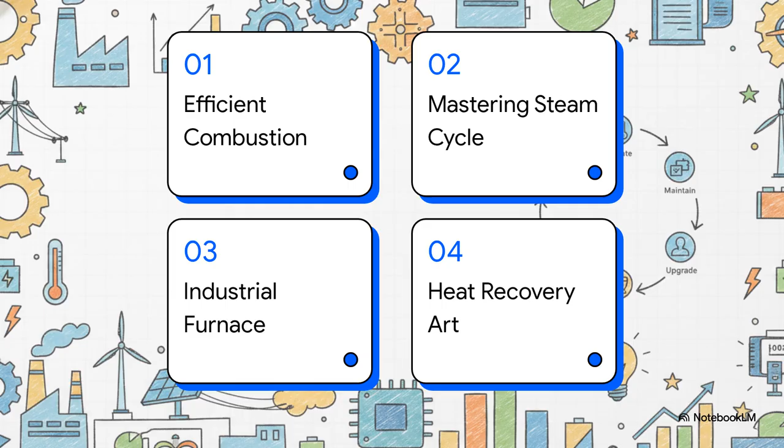Okay, let's dive straight into Section 1, Secrets of Efficient Combustion. We're starting our tour right at the burner. And to really grasp what's happening here, you have to understand something called the stoichiometric ratio. Now, this is the exact, perfect theoretical amount of air you'd need to completely burn a specific fuel. So, for example, to perfectly burn 1 kilogram of pure carbon, you need exactly 11.6 kilograms of air. No more, no less. Now, in a perfect world, that is all you would use, right?

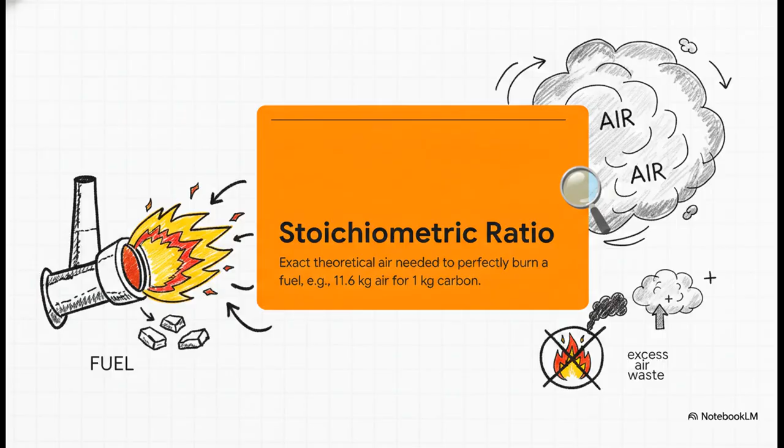But out here in the real world of massive industrial boilers, well, perfect mixing is basically impossible. So engineers actually have to pump in what we call excess air just to make absolutely sure all the fuel burns. Because if they don't, they're just wasting fuel as unburnt carbon. And what we're looking at here brilliantly illustrates how the actual type of fuel dictates that excess air. Natural gas, that is the gold standard. It mixes so incredibly easily with air, so it requires the absolute lowest amount of excess air.

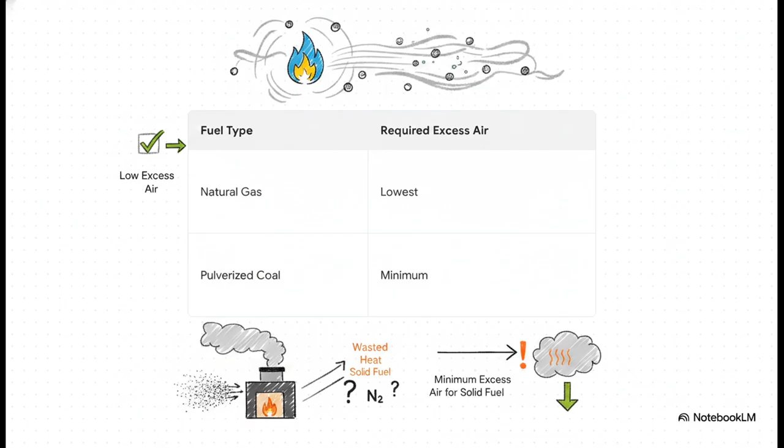But on the flip side, solid fuels are way harder to burn efficiently. However, there's a workaround. If you grind coal down into a super fine dust, what we call pulverized coal, you can actually achieve the minimum required excess air for a solid fuel. And this is a huge deal because the less excess air you use while still getting complete combustion, the less heat you waste warming up useless nitrogen that's just going to fly right out the chimney.

Which naturally brings up a really fascinating question. If we want to be perfectly efficient, why can't we just cool that exhaust gas all the way down to 0 degrees and capture every last drop of heat before it escapes? I mean, it sounds like common sense, right? Why waste it? Well, thermodynamics and chemistry have a pretty harsh reality check waiting for us.

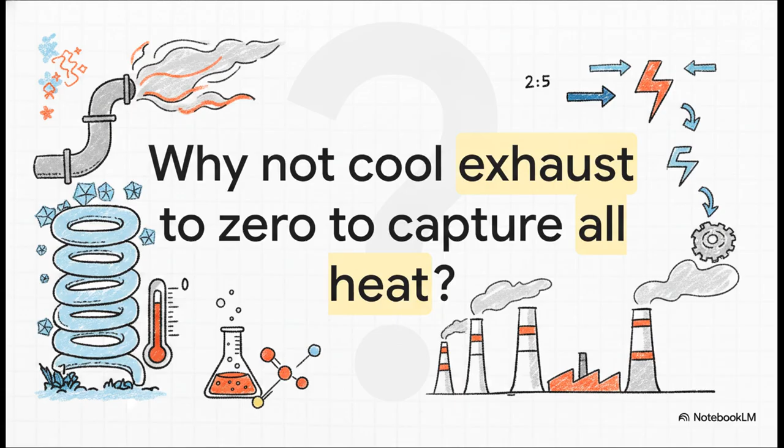So here is the crucial point. It's something engineers call the sulfur limit. You see, a lot of industrial fuels, especially things like furnace oils and coal, naturally contain sulfur. When you burn them, they form sulfur oxides. Now, if you cool that exhaust flue gas too much, that gas actually condenses into a liquid. And because of that sulfur, the liquid is a highly corrosive acid dew. It will aggressively eat right through the metal pipes and the chimney.

It's a nightmare. Therefore, the sulfur percentage in the fuel actively sets a hard, non-negotiable lower limit for your flue gas temperature. You literally have to throw some heat away just to protect your own equipment. Crazy, right? All right, moving right along to Section 2, Mastering the Steam Cycle. We are moving out of the combustion chamber now and into the high-pressure pipes.

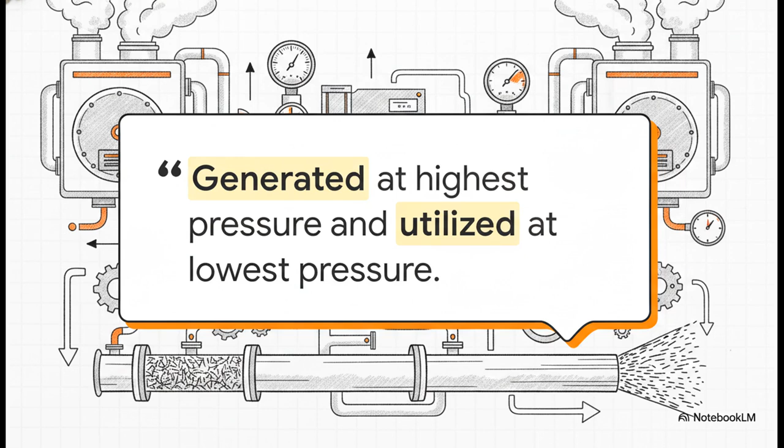Now listen, if you take away just one golden rule from industrial plant engineering today, let it be this one. Steam should always be generated at the highest pressure possible and utilized at the lowest pressure possible. By generating it at super high pressures, the steam takes up significantly less volume. That means you can transport massive amounts of energy through much smaller pipes, which obviously saves a ton on infrastructure.

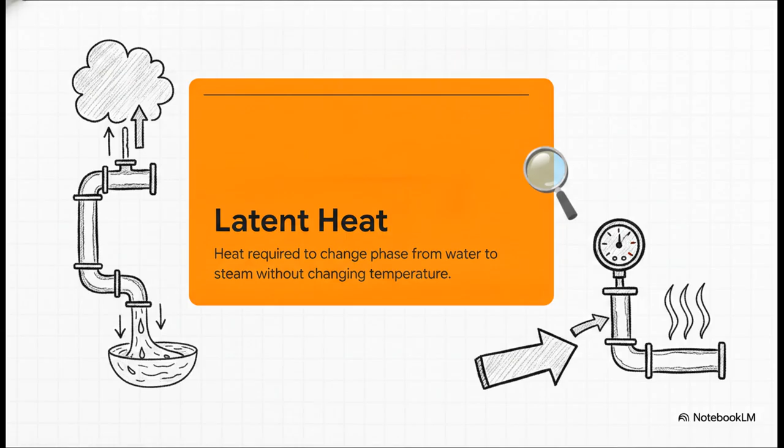But why use it at low pressure? Well, to answer that, we have to talk about latent heat. Latent heat is basically the thermal energy required to change water into steam without actually changing its temperature. When steam condenses back into water on a piece of process equipment, it releases this massive payload of latent heat. And here is the real trick. As steam pressure drops, the amount of latent heat available actually increases. So, using low-pressure steam gives you the absolute biggest bang for your buck when you're heating an industrial process.

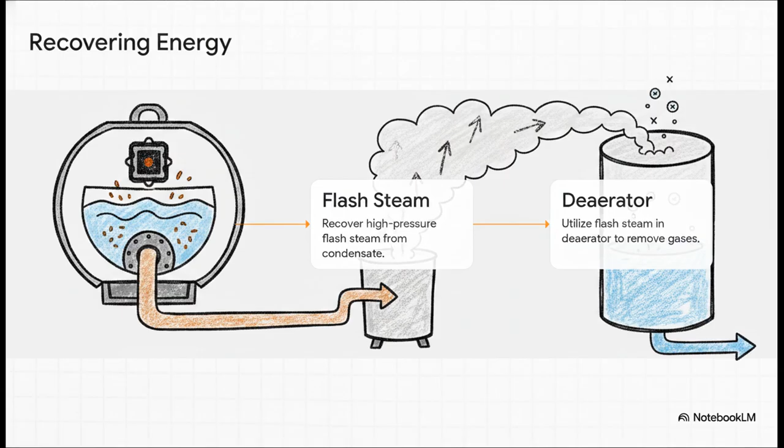At this extreme pressure, the boiling point of water is incredibly high, but the latent heat of evaporation drops to absolutely zero. Zero. The water just instantly turns into a vapor without needing any of that phase change energy at all. Okay, so let's see how all of this builds into real-world energy recovery.

Boilers are constantly boiling water, obviously, which leaves behind these really concentrated solid impurities. To stop the boiler from clogging up, engineers have to perform a continuous blowdown. They basically drain out some of this hot, dirty water. But that water is under high pressure and it's packed with energy. We can't just waste it.

So first, they remove that continuous blowdown. Second, as this high-pressure water hits a lower pressure tank, a portion of it instantly flashes into pure high-pressure steam. And finally, step 3, they recover this flash steam and route it directly into a deaerator. That's a crucial device that uses the heat to basically boil off oxygen and dissolved gases from the incoming feed water. It literally stops corrosion before it even has a chance to start.

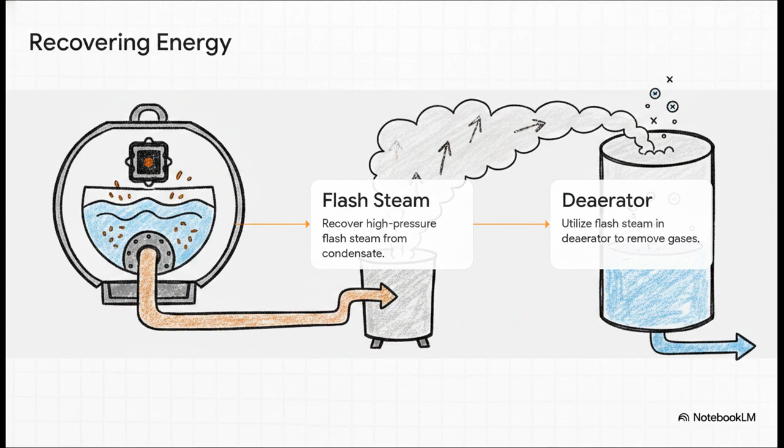Okay, let's step into section 3, inside the industrial furnace. So, leaving the boiler room, we are heading straight into the manufacturing core. And let me tell you, operating a furnace is not just about cranking up the gas. It's a super delicate balancing act. You absolutely have to maintain a slight positive pressure or draft inside the heating zone. If it goes negative, freezing ambient air gets sucked right in through the doors, instantly ruining your efficiency and oxidizing the metal stock you're trying to heat.

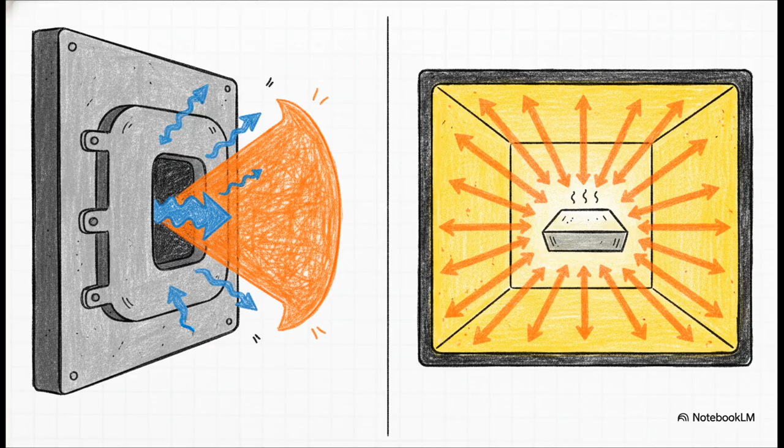Furthermore, at these extreme temperatures, the vast majority of heat transfers into the product via pure thermal radiation. Because of this, engineers apply these special high-emissivity coatings to the inner surfaces of the furnace. This massively boosts the wall's ability to radiate heat directly back into the product. Of course, none of that heat even matters if your furnace literally melts itself, right? And that is where refractories come in. These are highly specialized heat-resistant bricks.

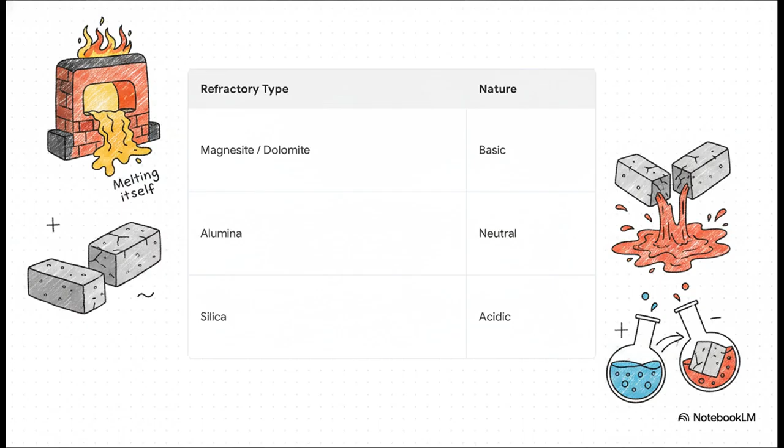The choice of brick depends entirely on the chemical nature of your process. As you can see, magnesite and dolomite are basic in nature. Alumina acts as a neutral refractory, and silica is highly acidic. It's Chemistry 101. If you use an acidic brick in a process that generates a basic chemical slag, that brick will literally just dissolve. The way you actually operate the furnace also completely dictates how you insulate it.

Let's compare batch furnaces, which are heated up and cooled down for every single load, against continuous furnaces that just run nonstop for months. If you use really heavy bricks in a batch furnace, you are going to waste massive amounts of fuel just heating up the actual bricks during every single cycle. Therefore, in batch furnaces, lightweight ceramic fiber insulation is an absolute game changer for maximizing your fuel savings. It has incredibly low heat storage, which means your expensive fuel heats your product, not your walls.

And that brings us to our final stop, Section 4, the art of heat recovery. In this final stage of our tour, it's all about how clever engineering captures the leftovers. A huge part of this is cogeneration, which just means producing two forms of energy from a single fuel source. In a topping cycle, the fuel is burned primarily to spin a turbine and make electricity. Then, the leftover exhaust heat is used for industrial processes.

But in a bottoming cycle, it's the exact reverse. The fuel is burned primarily for a massive high-temperature process, think like a giant glass-melting furnace, and then the leftover exhaust heat is captured to produce byproduct electrical power.

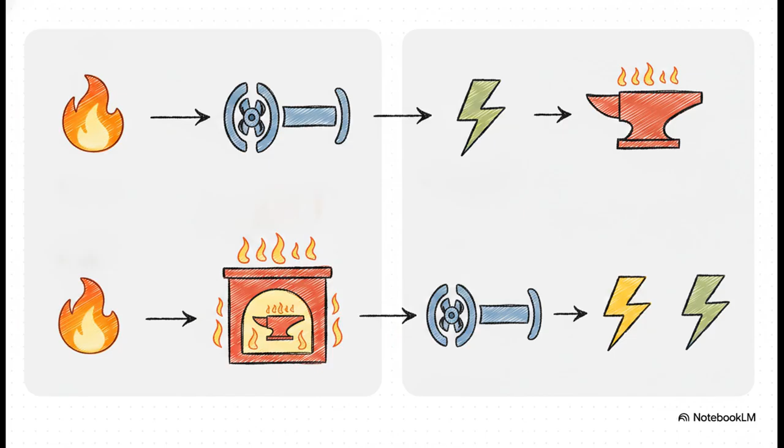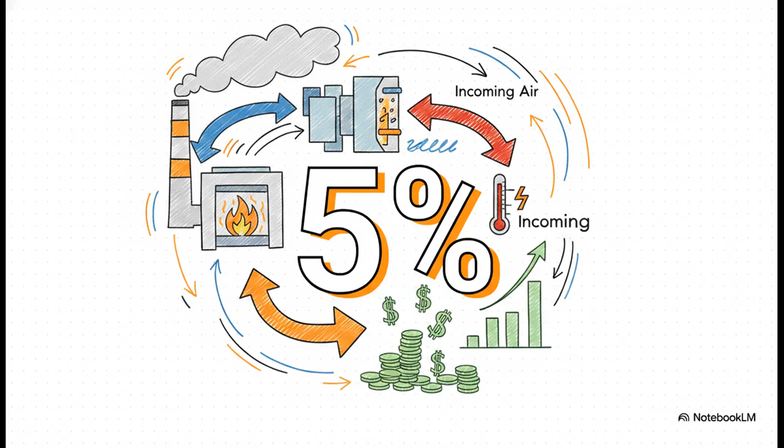The numbers behind this kind of heat recovery are honestly staggering. Just preheating the incoming combustion air using waste exhaust gases by a mere 100 degrees Celsius will directly save you 5% on your total fuel bill. 5%! Now, in a factory spending millions of dollars on coal or natural gas every single year, that 5% saving is enough to completely transform the profitability of the entire company. It's massive. And to actually achieve this, modern facilities deploy some truly incredible technologies.

Heat pipes use internal capillary wicks and vacuum-sealed fluids to transfer thermal energy up to 100 times more effectively than solid copper. Thermocompressors use high-pressure motive steam to literally suck in and upgrade useless low-pressure waste steam back into a fully usable state. And fluidized bed combustion, or FBC boilers, actually burn coal inside a floating bed of limestone. Why? Because that limestone chemically captures those nasty sulfur emissions right inside the boiler itself.

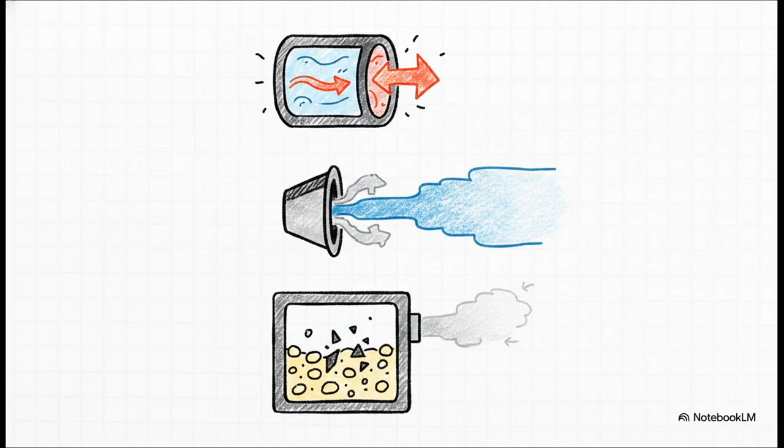So, we have toured the combustion chamber, we've mastered the steam cycle, survived the furnace, and successfully recovered the waste heat. But I want to leave you with a final, kind of provocative thought here. After millions of dollars of engineering and optimization, if just a single $50 mechanical steam trap fails in that piping network, it can leak live steam 24 hours a day. How much of that carefully recovered energy simply vanishes into thin air just because of poor maintenance? True efficiency isn't just about brilliant design and thermodynamics, it's a relentless system-wide battle every single day.